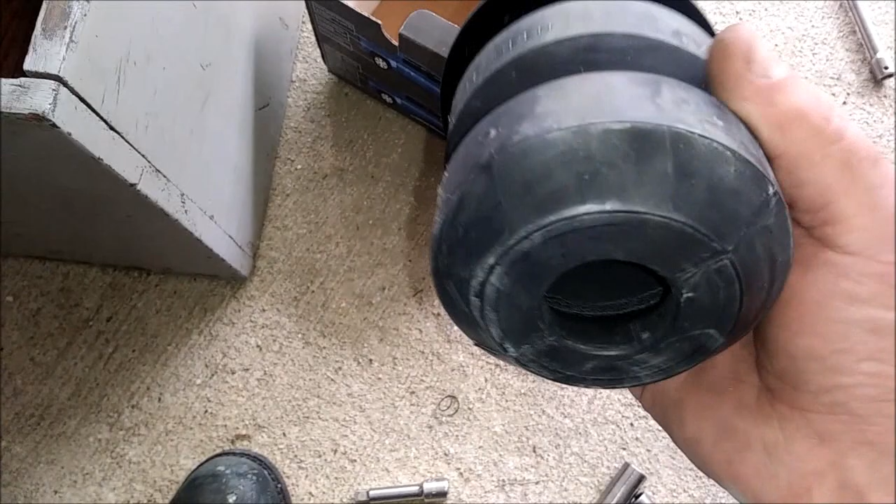Alright, we're installing Timbren front bushings. These are basically bushings that are imitation airbags, but they're hollow and made of some type of neoprene.

They're pretty expensive, these are $214. These are for the E-Series van. There's a bit of confusion - there's nothing on YouTube, no instructions on how to install them on a modern E-350 van. And when I say modern, I mean from 92 on up to about 17 when they quit making them.

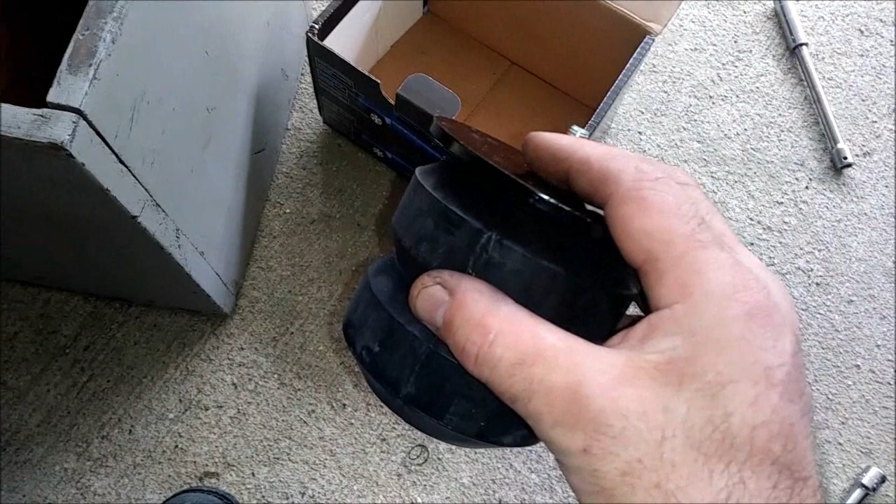Now this is an E-350. We're installing these on the front, and what they basically do is take the place of the original bump stops, which are that little block of shit right there.

Now they wanted us to put this extra piece of rubber on top here with a nut coming through, they called it a pre-assembled package. I figured out real quick that even with Moog heavy duty front springs on this E-350, having this extra half inch or so was going to throw my front end alignment way out.

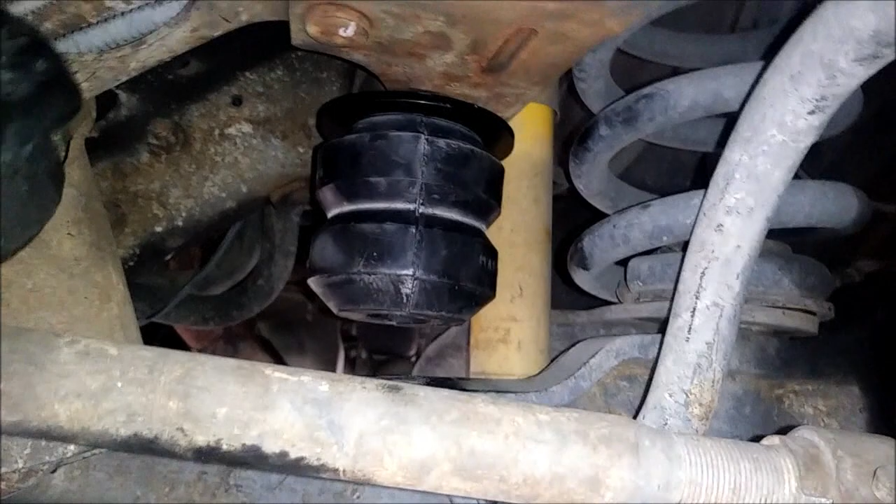It's plenty stiffened up on this one side we did already, and gives me enough height. Anyway, this is what it looks like when it's on, the way that I installed it. Okay, there it is. Now you see it replacing that little rubber wedge triangle bullshit they had on there from the factory.

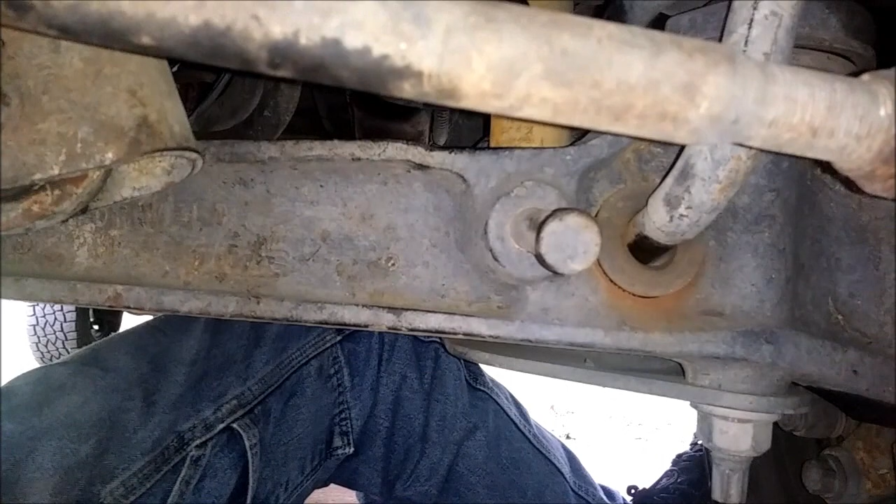You see how far away it is now, and actually in reality it makes contact with the twin I-beam system right here when the vehicle is lowered. My boy's just jacking up the other side so we can get the other one on, take the other one off and get the other Timbren on.

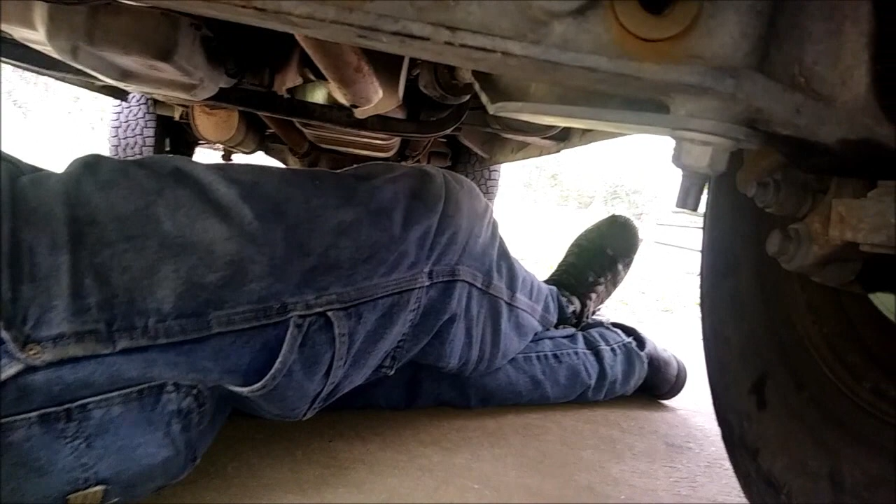Now it made a huge difference for roll control in the back, a huge difference. At first it was hard to get used to, but then the bushings wore themselves in after a couple hundred miles, and now we've got a softer ride but still full roll control. I'd say much more, and it also gave me about a 2-inch lift in the back. Now I have heavy duties on the rear.

It made a huge difference. I'd say for all the people out there with sagging front ends, where you see these funky E350s, 250s and 150s rolling down the highway, instead of buying new springs and going through all this choppy tire alignment bullshit with the twin I-beam system and all the problems Ford has, get you a set of these for $214 and slap them on there, forget about changing your springs, and get that tire squat sag front end off the road. Put something like this on it for $214.

That's pretty cheap to take care of this problem. Not that mine's sagging or anything, I'm just trying to get a little lift in the front to match the rear, and it looks like that's how it's working out when the vehicle is stable. At least on this side, and this side pulled the weight of the other side before we were even installing the other side.

So I imagine when we get this other side installed, it's really going to be kick-ass as far as roll control. I mean, when we used to have to do 35 around an on-ramp, we can do about 60 around an on-ramp and stick to it.

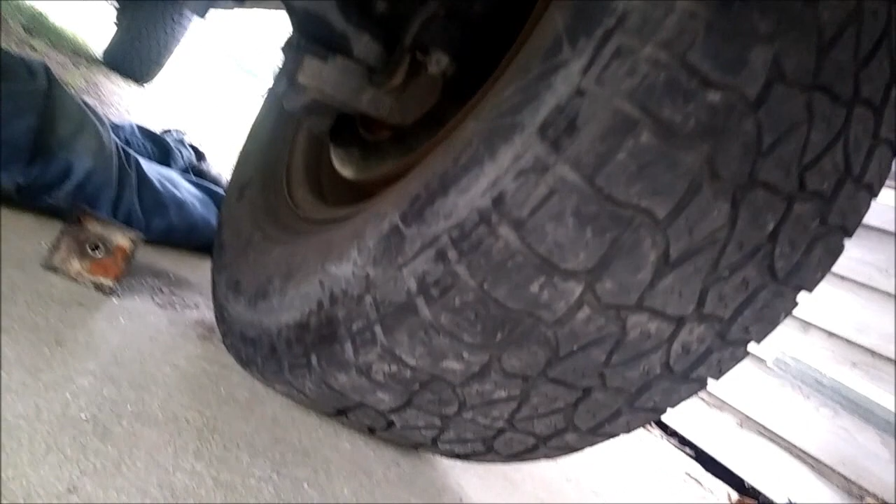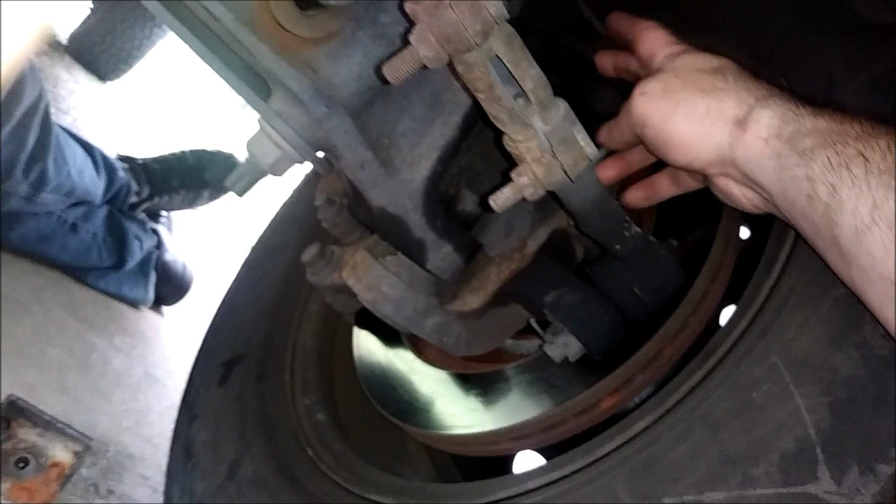But most of all, the most important part besides roll control is front tire chop. Everybody should be familiar with the Ford twin I-beam system tire chop, it's a pain in the ass to get right. It's caster camber - you get these little bushings up here at the top, they go right in there. You loosen this bolt, and you've got A, B, C, D, E, F, G and all that, and you rotate it to get your toe in, caster and camber right, and then the ass starts squatting when you tow something, and you still get tire chop.

You change the shocks, you get tire chop. You change the springs, you get tire chop. It doesn't really matter unless you can somehow stabilize the vehicle within, you know, bouncing and moving around within a certain distance. And that's what I intend to achieve with these.

Timbrens. Now they claim since 1964 they've been making these, you know, they've been putting them on 18-wheelers and all kinds of shit, and then they put them on cars now and trucks, and they sell them for cars and trucks.

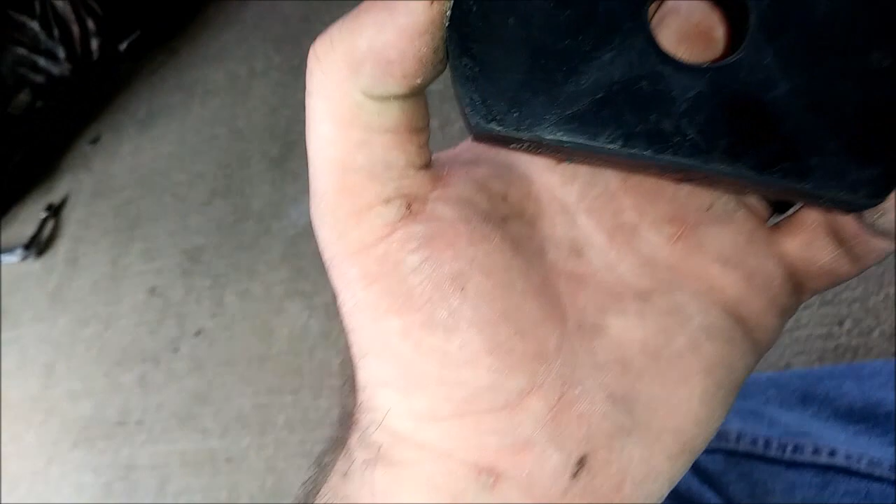Now I don't see why a solid piece of rubber like that wouldn't be a good idea. Now when the vehicle's lowered, that Timbren makes full contact with the twin I-beam, and like I said, if I'm not satisfied with the height in the front, I can go ahead and add this extra piece of rubber. This is a piece of rubber here that goes on top of a piece of plate steel, and then of course that spongy looking donut underneath it.

Let me see if I can get a good shot of the rear. Here we go. You see how they're making contact? Pretty simple installation, piece of cake. All it uses is a U-bolt with a plate at the bottom, and then at the top it's a special bracket made for direct installation that replaces your existing bump stop wedge.

And man, you talk about taking the sag out of the leaf spring and adding roll control. I would choose that over sway-away leaf helpers any day of the week, or any kind of sway bar system.

So that's just a little idea on what it's like having those type of bushings on your vehicle.

Now this is my first time really fooling around with them, so I may make another video in 2 years or a year from now and say, hey, these things are a piece of shit, they're sagging, the truck's sagging, went back to normal, and the bushing split down the middle.

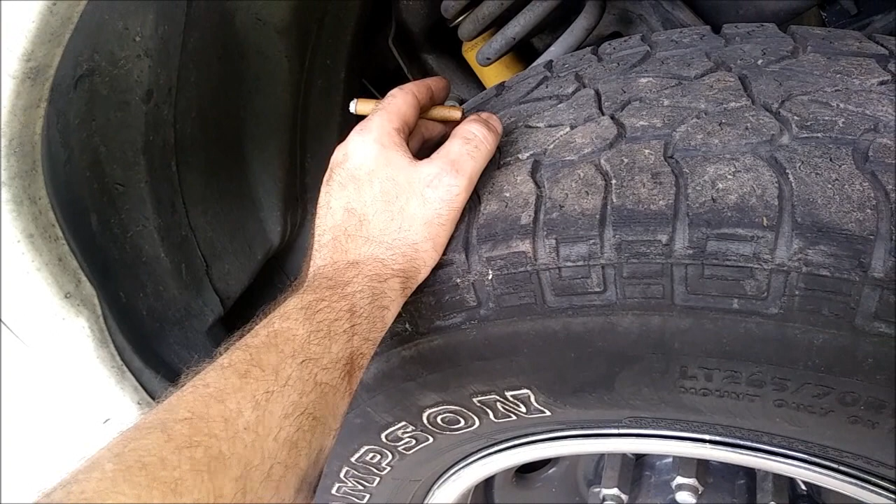Now I was going to bag this vehicle, but I decided against it. As soon as I'm finished doing this front end with these Timbren bushings to help, I'm going to change the upper bushings, the upper caster camber bushings that Ford famously uses.

Damn it, this drag link. Yeah, thank you, son. This damn drag link. I got another one sitting in a box. I've been having it for about a year. I'm just too lazy to get under here and change it. But since I put a full AC compressor and all that dryer and everything on here and blew out the system, I might as well go ahead and install all this shit too.

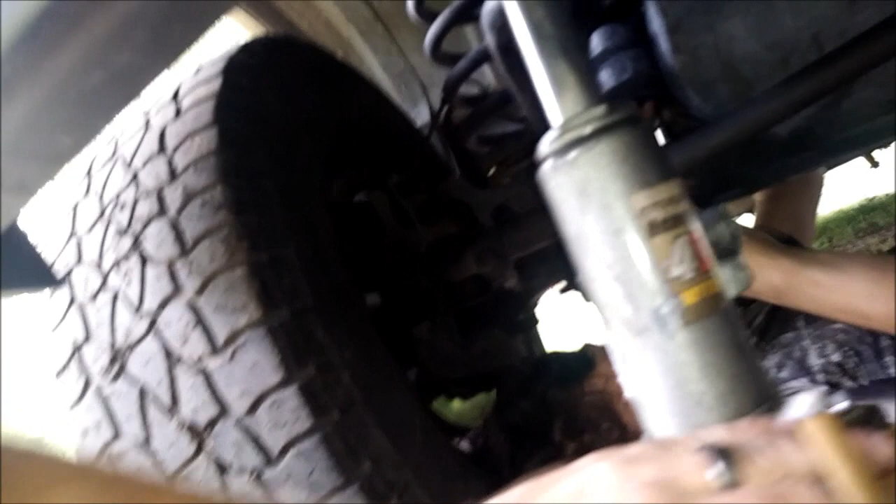Anyway, that's my video of Timbren suspension for the E-350 Econoline, the E-Series van. Now, they have instructions for the 80, for the 90, for the 91 and below, but they don't have good instructions for these current models, the newer models, or whatever these are, the third gens.

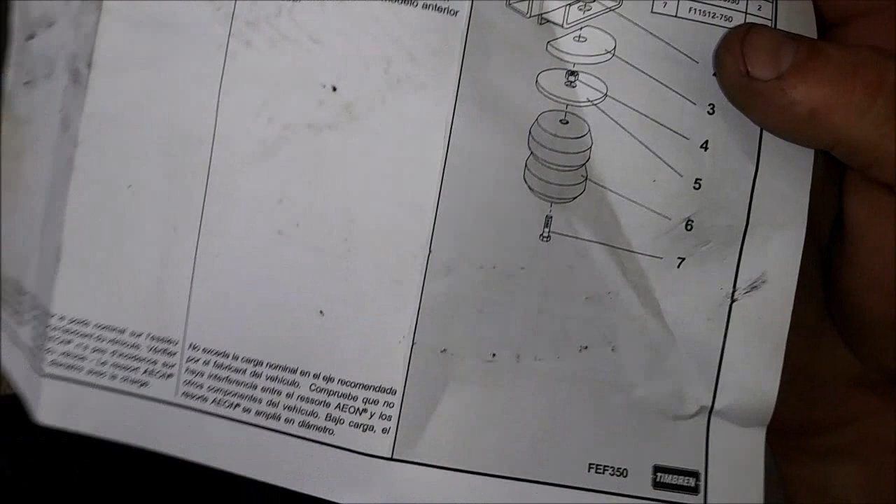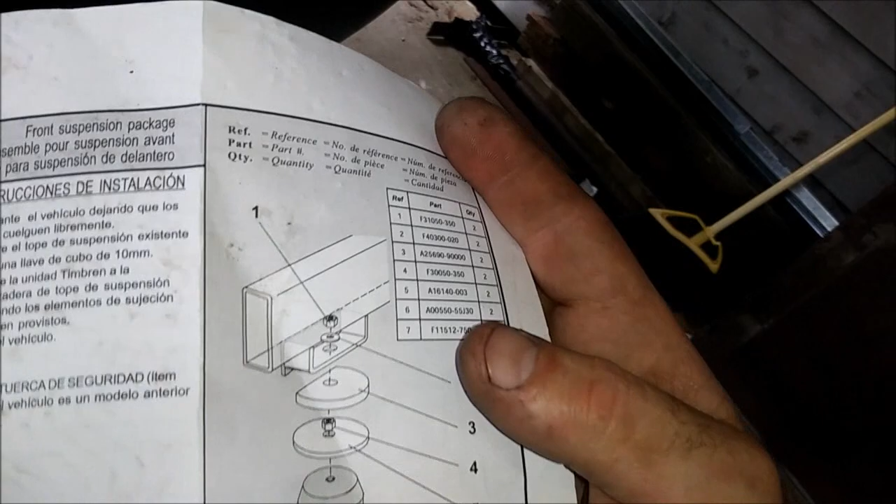Let me show you the damn instructions they give you, and I'm telling you, there's not much more online for it, so I'm making this video solely for that purpose. They got a bunch of bullshit where people are just showing some of those stationary mount cameras and driving all around and bouncing down the road and shit through a trail, but they don't show you how to install the motherfuckers. I mean, they show you the rear, but they don't show you the front, and they don't show you how it works.

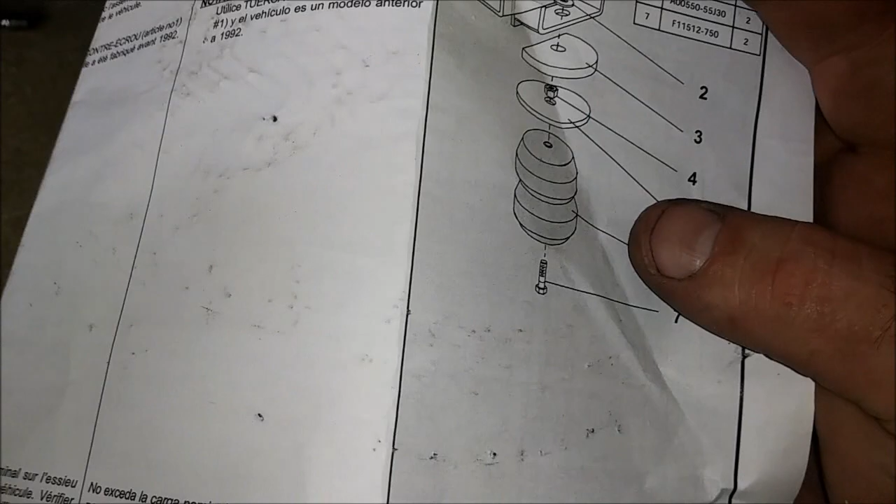Well, this is how they say install it. But the front of my twin I-beam don't look nothing like this. So that threw me for a loop, and I had to get under here and do my own experimentation with this.

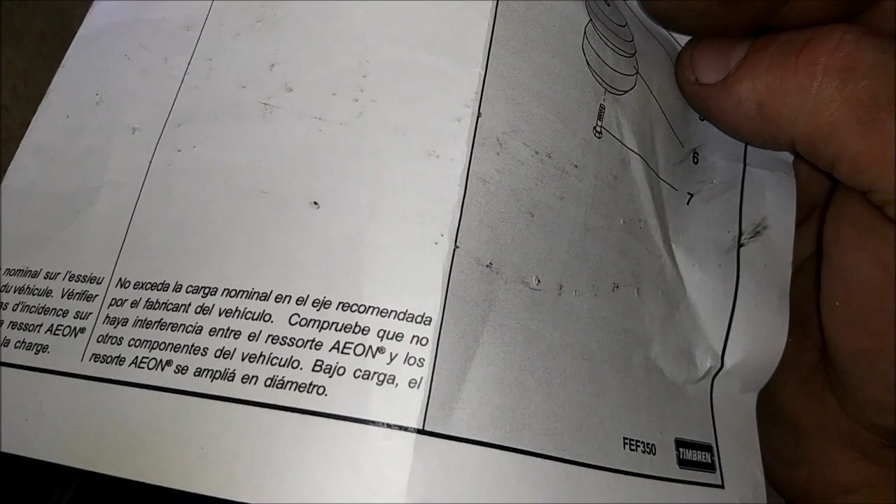Basically you just eliminate this top nut, that lock washer, and that lock nut, and you keep the steel. You can keep the rubber grommet up here if you want for an extra half inch lift in the front. You put this one bolt clean through, and you've got barely enough clearance with the I-beam in the way. You have to install them with your ratchet and extension toward the front of the truck. You can't go from behind, so get used to that idea right away.

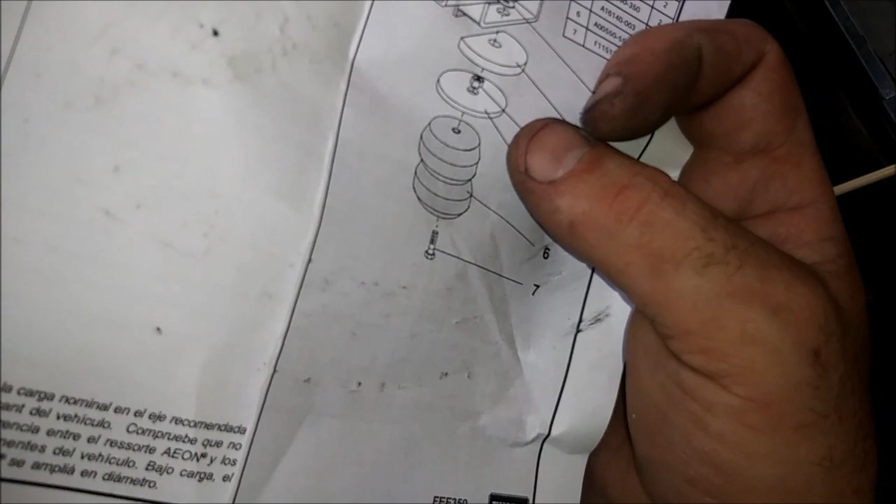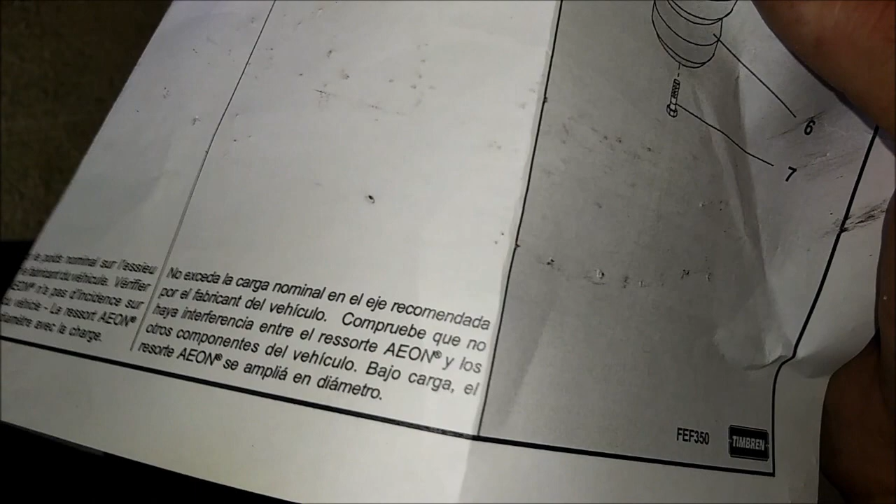A swivel may come in handy, so keep that in mind, because you've got to stick the ratchet inside this rubber grommet to get this bolt tight. Basically you're just bolting this steel plate and this piece, the main rubber contact, onto the frame and into the threads of the frame. It comes with a grade 8 bolt, but the threads in the frame aren't really worth a shit. But the force is just bouncing straight down, so as long as this metal's flat against the frame, I don't see it actually coming loose or causing a problem in the future. I could be wrong, but I don't see it happening.

And this is really all they give you - this is the only instructions they give you. So this video is for people who have saggy ass front ends on their E-Series vans, work vans, 2-wheel drive, because I know some of you out there are still using them. They give no instructions for it at all, and there's nothing online anywhere other than that shitty piece of paper and a bunch of misrepresentation on YouTube where you click on a Ford but it's a Mazda truck, showing the rear or some other bullshit. So I'm giving you the lowdown on how to install these the proper way.

Now, I told you I already dropped the front end on this side. It was making full contact all the time - that's normal, that's what it's supposed to do. I imagine if I added that half inch rubber leaf that they gave us, it would be even stiffer in the front, but that's just plenty stiff enough for me. As long as it keeps my wheels from darting out like a retarded truck going down the highway, or keeps my vehicle from handling like that, I'm perfectly content with this setup for $214.

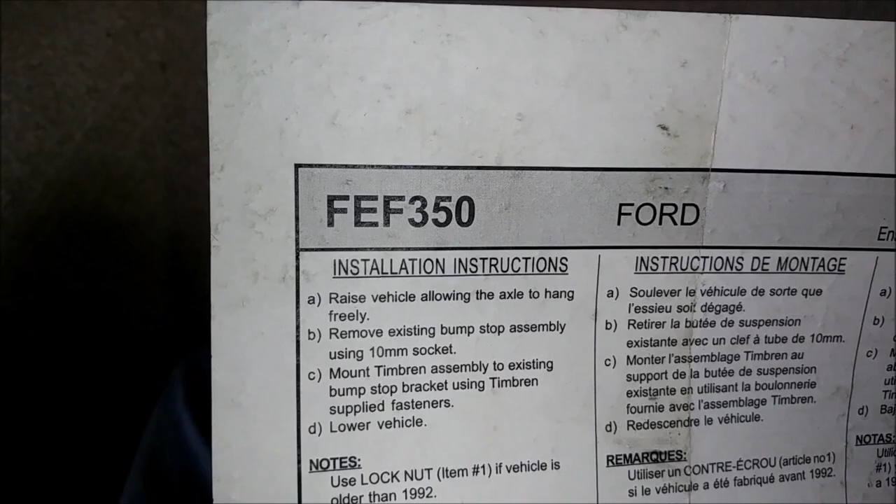So that's my video on the Timbren front suspension. The part number for this Ford, which matches a shitload of vehicles, is the FEF350. Now they make an FEF350 something, SD maybe, that's some kind of heavy duty for E450s and such, and I imagine they're stiff as a brick. So that's all, folks, on Timbren front end bushings for Ford's E350 or E-Series vans.

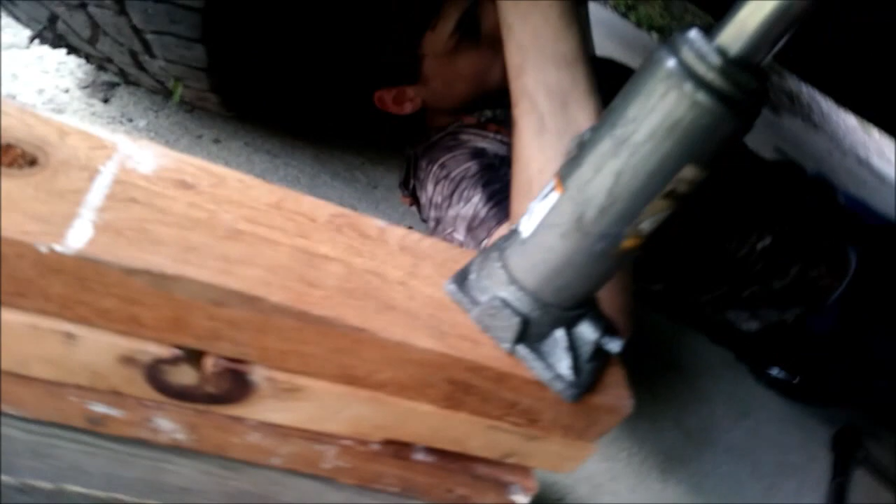Now imagine the F-Series are the same for the 2-wheel drive twin suspension, or their form of twin suspension is a little bit different than the E-suspension, but still the same concept. Now you can see my boy's got his bolt started, and he's got to go in through this I-beam sideways - this is where a swivel would come in handy. Once it gets straightened out, it makes straight contact once it's tight with the twin I-beam. So just wanted to let y'all know that.

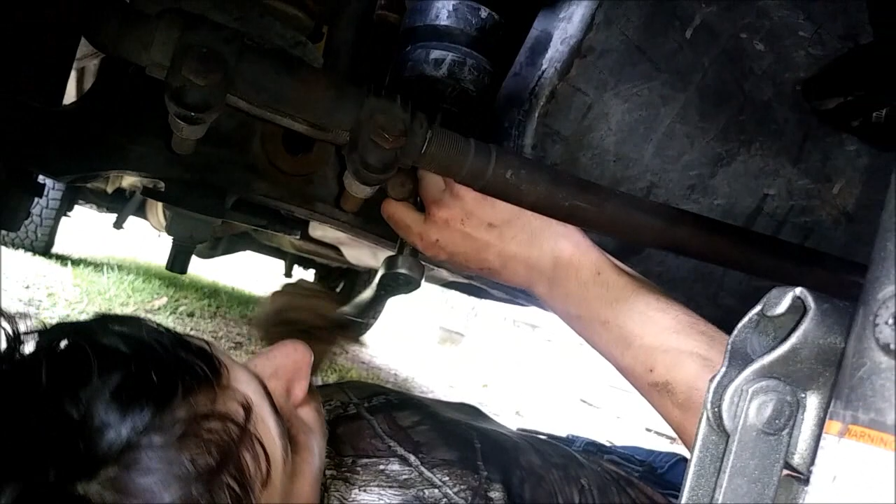And these are new heavy-duty springs, changed about 7 years ago when I bought the vehicle with 60,000 miles. The vehicle only has 114,000 now, so we still got a good little ways to go on it. That's the only reason I'm wasting any money on this vehicle.

That, and I needed to tow and haul my little Amigo around, which is sitting right there, that pretty little thing, ready to tear the fuck out of the mud. Anyway, I'll make some videos on that, I promise. Okay.